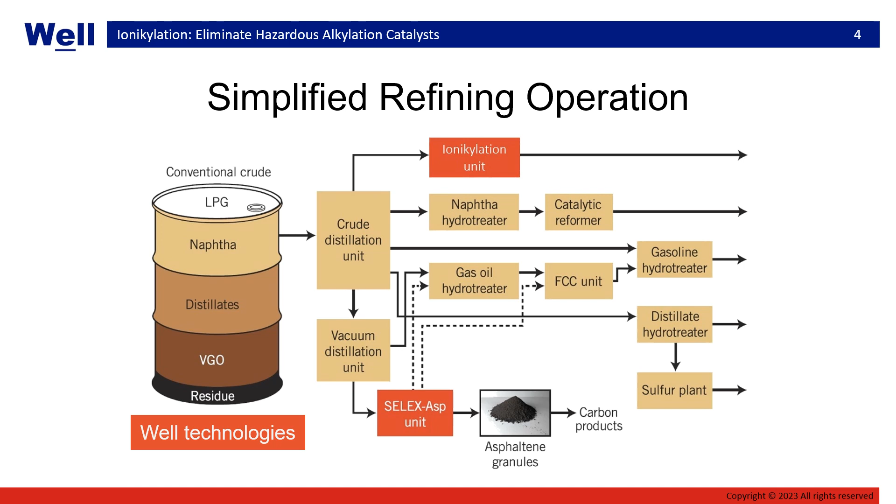Well Resources currently offers two unique and commercially proven technologies to the downstream sector. One of these technologies, shown at the bottom, is the selective extraction of asphaltenes, or SELEX process, and this is a carbon granulation and removal process for upgrading and decarbonizing the bottom of the barrel. The other technology is our safe and sustainable alkylation process called Ionikylation, which makes use of a proprietary composite ionic liquid catalyst, and this technology is the focus of today's discussion.

The objective today is to provide you with an overview of the Ionikylation technology and give you some insight into our numerous commercial successes within the last decade. We're going to start the discussion today with an overview of alkylation, seeking to answer the questions: what is alkylate? How is alkylate produced? And why are traditional alkylation processes inadequate? We'll then go on to describe the Ionikylation process, including what makes it unique, what are the advantages, and what is the commercial status of the technology.

Alkylation overview. The alkylate market is lucrative and has seen good historic growth. It is expected to grow even further over the next decade. In 2021, the global alkylate market was estimated at $1.15 billion, and it is expected to exceed $1.5 billion by 2029. This represents a compound annual growth rate of about 3.8% for that period.

This growth is underpinned by a variety of factors. In the developing world, robust population growth and increasing standards of living are driving gains in overall gasoline consumption, and by extension, alkylate consumption. In developed economies, overall gasoline demand is expected to drop throughout the years of 2025 to 2050. But nonetheless, we see a shift towards higher performance fuels for higher efficiency engines, which supports the alkylate demand.

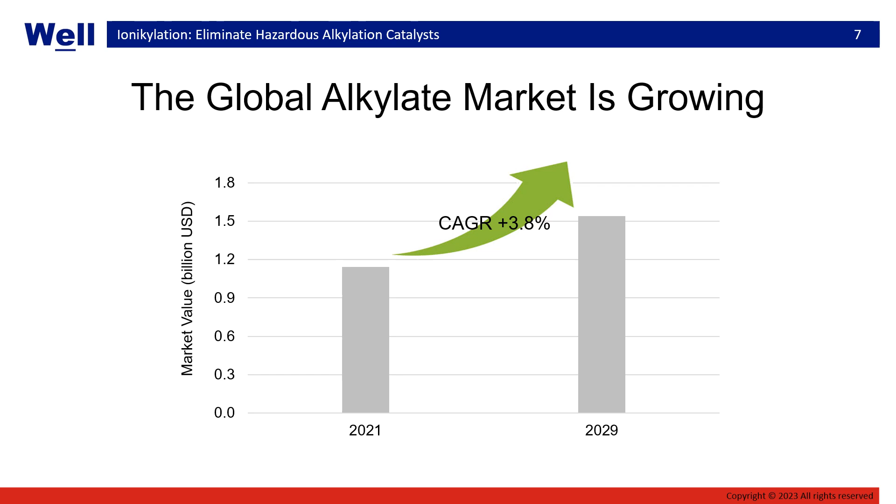From a process chemistry standpoint, alkylation is simply a chemical process where an alkyl group is attached to an organic substrate. But in a refinery setting, alkylation refers to a particular process that reacts light, mixed olefin feedstocks into predominantly C8 compounds for blending into the gasoline pool. Alkylate is known for its inherently high octane number, typically in the range of 92 to 96, and as high as 98 to 100. It increases the knock resistance of a fuel, is clean burning, is free from olefins and aromatics, and has low sulfur content.

When we look at the various alkylation processes on the market, an important question to ask is, how do we get from point A to point B most effectively, contextualized by the technical, economic, and environmental factors? Traditional alkylation processes have been used for roughly 80 years, and they make use of strong acids to break chemical bonds and facilitate that alkylation reaction.

The main catalysts currently in use include hydrogen fluoride or concentrated sulfuric acid. With these catalysts being strong and highly corrosive acids, the physical processing infrastructure is typically constructed using expensive and exotic metallurgy, and operators require the use of robust safety and containment systems. This is especially true for hydrogen fluoride, as it has a propensity to vaporize into a dense toxic cloud that can threaten the livelihoods of plant personnel and the public.

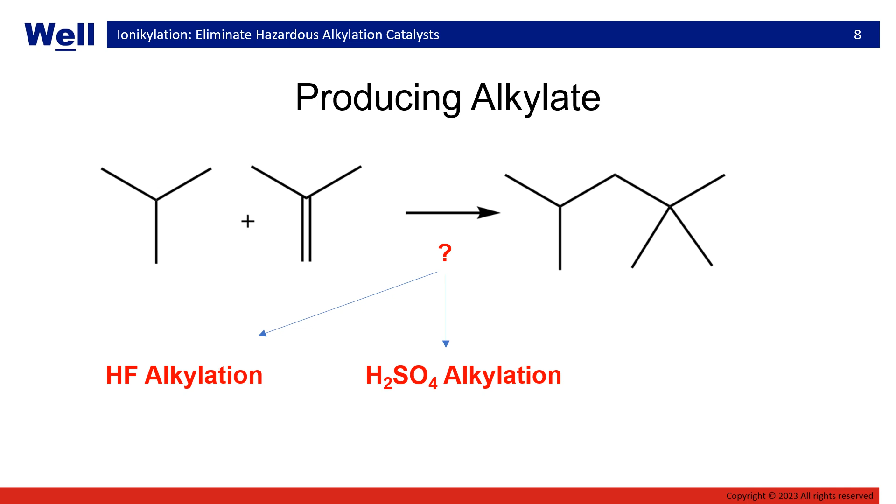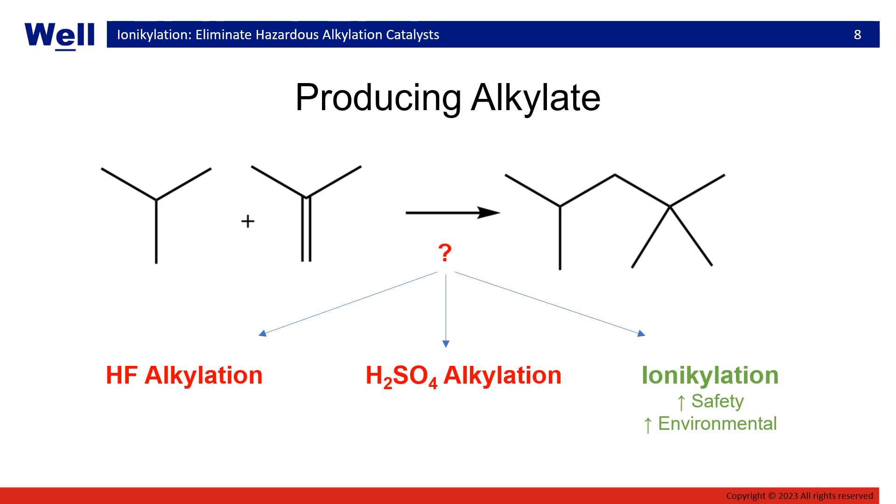With sulfuric acid, large volumes of catalyst are required, and this poses an environmental risk when considering the high emissions intensity associated with its regeneration. WELL's Ionikylation technology leverages new sciences to address both the safety and environmental problems commonly associated with acid-based technologies without sacrificing performance or cost.

And this is important because refinery infrastructure all around the world is aging. In North America, we see a trend of cost cutting through maintenance and capital deferment to get longer run lengths, and a general cautiousness towards newer process investments. And every couple of years, near-miss incidents like these not only threaten the livelihood of businesses, but also the safety of workers and the community at large.

More frequently, old and unreliable refinery processing equipment may not necessarily lead to a near-miss incident, but unplanned shutdowns may lead to market disruptions and other business interruptions. Acid alkylation processes can be especially problematic as corrosion risk combined with aging infrastructure can form a recipe for disaster. On the left is an instance from 2019 where a U.S. refiner's HF alkylation unit suffered a catastrophic disaster, and the operator subsequently filed for bankruptcy protection.

Earlier this year, another explosion in an alkylation unit in South Korea tragically claimed the life of one and injured 9 others. Nobody ever wishes for this to happen. Events like this have become topics of heated debate as to whether the use of toxic and dangerous chemicals in refineries should even be permitted, especially if these operations are close to urban centers.

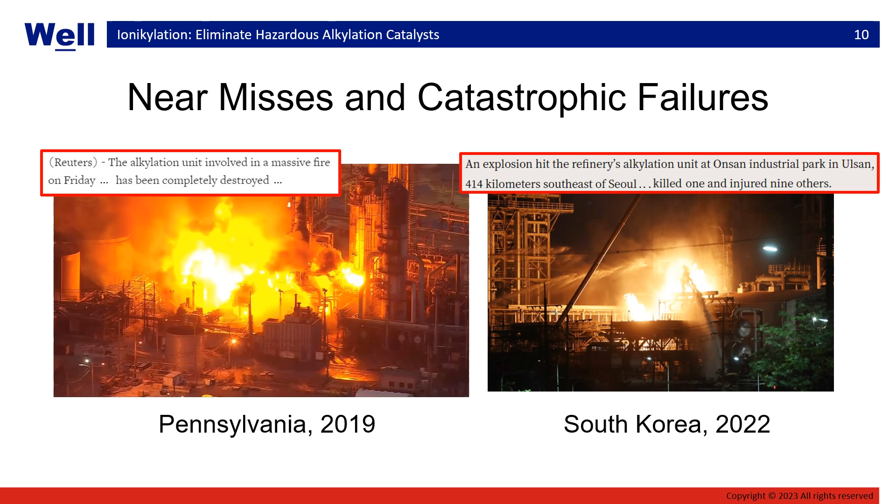Case in point, United States Chemical Safety Board, October 11th, 2022. The Chemical Safety Board published its more than 100-page final report on the 2019 Philadelphia Energy Solutions fire and explosion, where they highlighted the inherently unsafe nature of HF and what went wrong during that operation. As part of its recommendations to the EPA, the Chemical Safety Board said that technologies are being developed that could be safer alternatives to HF alkylation, and refiners should periodically evaluate these available alkylation technologies.

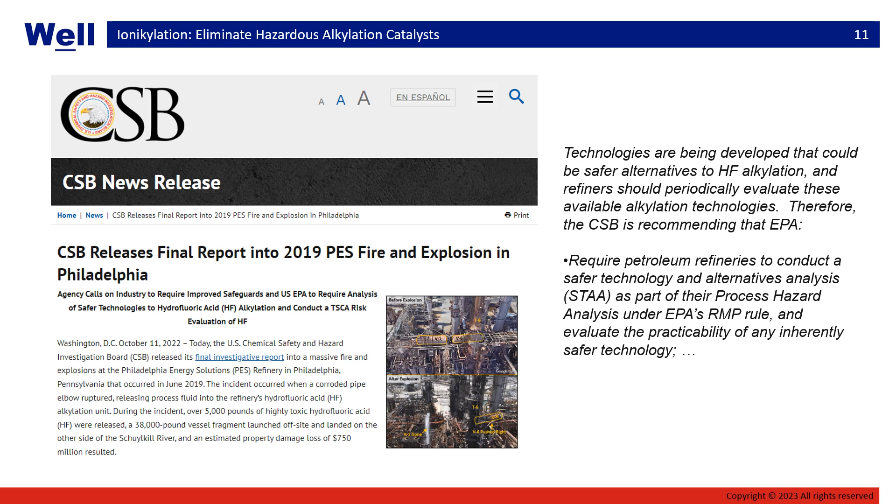The CSB is recommending that EPA require petroleum refineries to conduct a safer technology and alternatives analysis as part of their process hazard analysis under EPA's RMP rule, and evaluate the practicability of any inherently safer technology. To put it this way, in North America, regulatory authorities are stopping just short of a call to action forcing the implementation of safer alkylation alternatives. But as new technologies become more widely adopted, it will be increasingly difficult for refiners to justify continuing the operation of these unsafe acid-based alkylation processes.

In engineering and occupational health and safety, there's this principle called the hierarchy of hazard controls. At the top are the most effective ways to control your hazards, starting with outright elimination. As we move down this inverted pyramid, we observe a decrease in effectiveness while costs are additive with each layer. With traditional alkylation processes, the hazard is the catalyst itself. Being reliant on acid catalysts to run a process, refiners are then left with engineering, administrative, and physical protective controls to mitigate that risk.

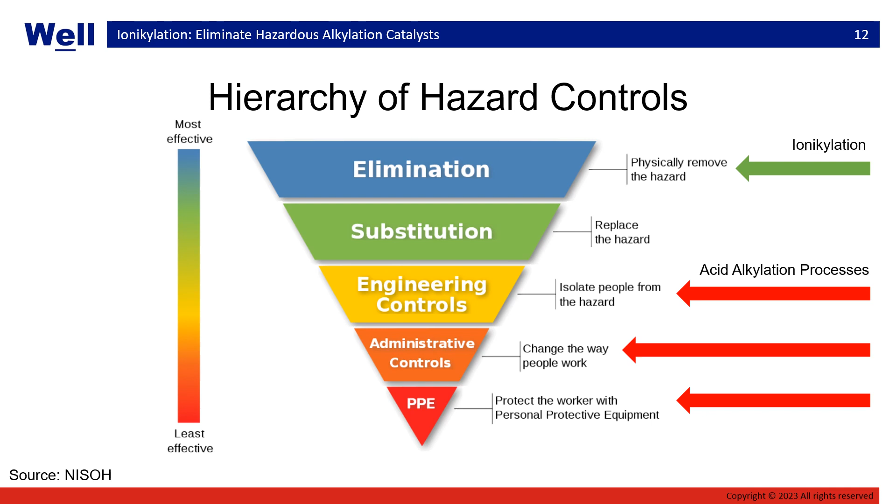For an HF alkylation unit, for example, this will include safety measures such as water cannons, water curtains, secondary containment, advanced air quality monitoring systems, specialized additives, containment suits, and specialized training and evacuation procedures. With our Ionikylation process, the intent is to outright eliminate that hazardous catalyst, enabling a refiner to simplify their operations, lower their costs, reduce the risks, and in some cases, save lives.

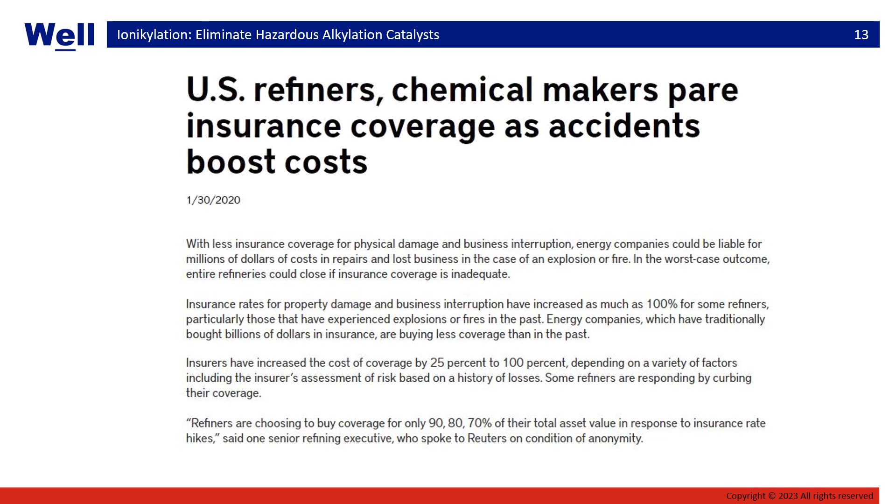We'll now move on to the discussion of the Ionikylation process itself, which derives its name from the composite ionic liquid catalyzed alkylation. Ionikylation is a commercially proven process backed by over 20 years of research and development in the ionic liquid space. The process is characterized by 5 sub-processes: feed pretreatment, reaction, product separation, product treatment, and catalyst regeneration.

The first step in any alkylation process is to pre-treat the feed so that it becomes compatible with the reaction system. Here we will be looking to remove key contaminants such as sulfur, water, and oxygenates. Once treated, the feed is sent to the reactor, where it makes contact with a dense circulating catalyst that facilitates the alkylation reaction. Afterwards, a series of settlers and separators are used to differentiate the reaction products, unconverted reagents, and catalyst, recycling as needed. The alkylate product may be further subjected to a product treatment method depending on the end user's requirements.

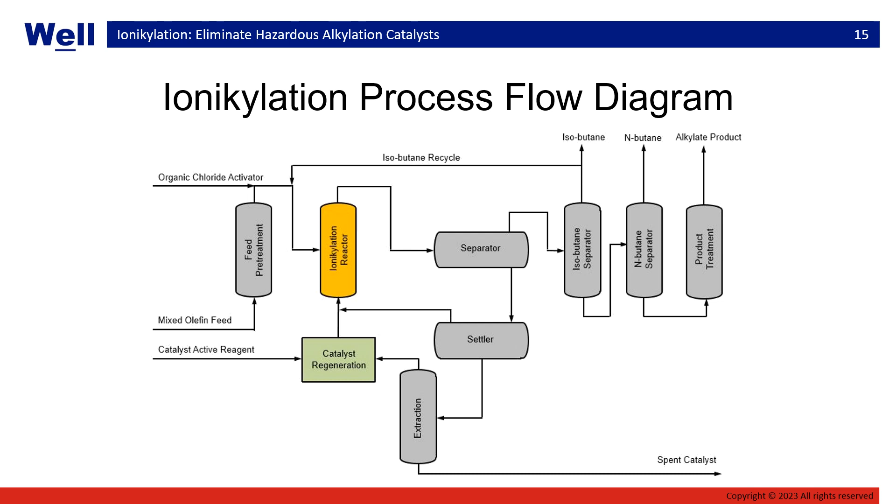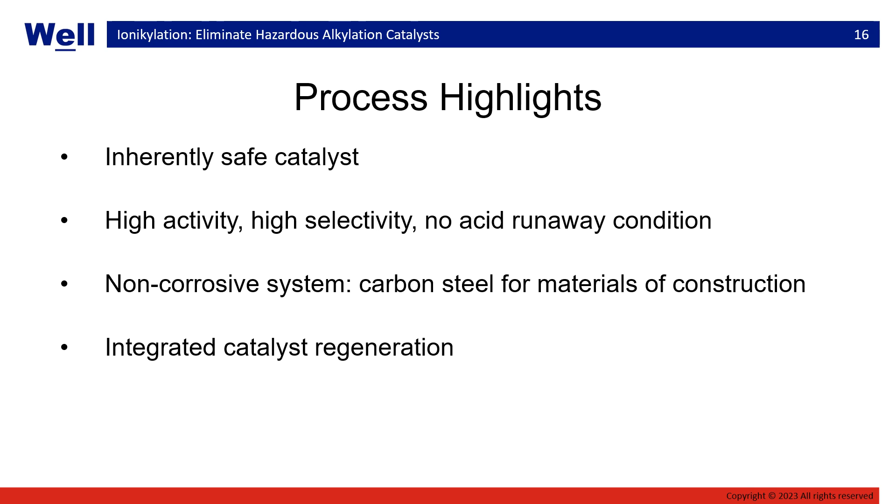Here, the key process highlights for Ionikylation are summarized, which we will cover in more detail. They include the inherently safe catalyst, enhanced performance measures, a non-corrosive system, and the integrated catalyst regeneration. The key to the Ionikylation process is our proprietary composite ionic liquid, or CIL catalyst, which is a specially formulated, non-volatile liquid salt material. This replaces traditional acid catalysts, increasing the safety for refinery personnel and the public.

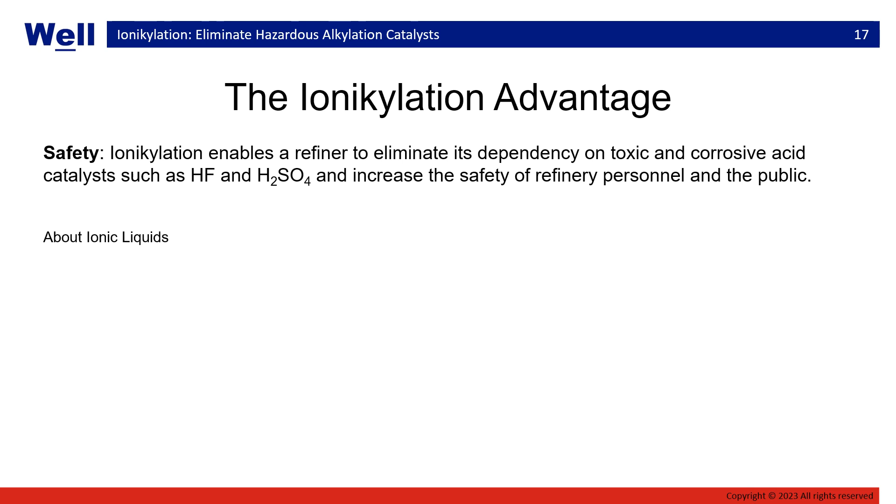Broadly speaking, the use of ionic liquids are based on relatively newer material sciences and innovations. Ionic liquids tend to have melting points below 100 degrees Celsius, and many parameters are available for fine-tuning their characteristics and applications. The chemical composition will affect key properties such as melting point, viscosity, density, solubility, and reactivity. And while acidity of ionic liquids can also be manipulated simply by controlling the concentration of certain species, many still tend to be corrosive. If you now move to the next layer of complexity in ionic liquids material sciences and introduce additional metallic species in the formulation, you get what is known as a composite ionic liquid, where the chemical, physical, and reactive properties can be manipulated even further.

Some notable characteristics about the Ionikylation catalyst is that it is both non-corrosive and exhibits zero or near zero vapor pressure. This means that in a spill scenario, the catalyst remains as a liquid, which enables safe and easy containment. Plant operators working in the vicinity of an Ionikylation unit do not require any special PPE beyond what is customarily deployed in refining operations where personnel may be exposed to light hydrocarbons.

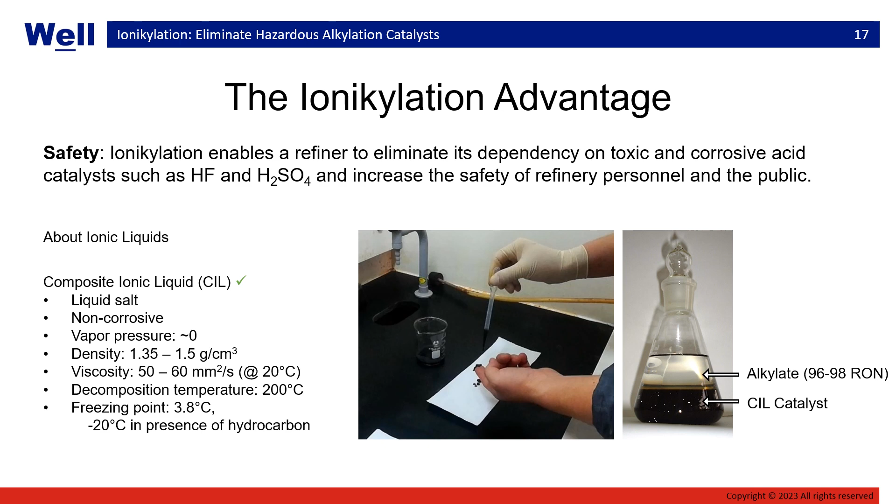Our proprietary catalyst uses a conventional chloroaluminate ionic liquid platform, modified with a transition metal to enhance the reaction mechanics. This enables the catalyst to overcome poor product selectivity issues that are commonly associated with simple ionic liquids, without the need for acidic additives such as hydrochloric acid. Here, it should be noted that when we refer to the term chloroaluminate ionic liquid, this means any ionic liquid that contains the tetrachloroaluminate anion.

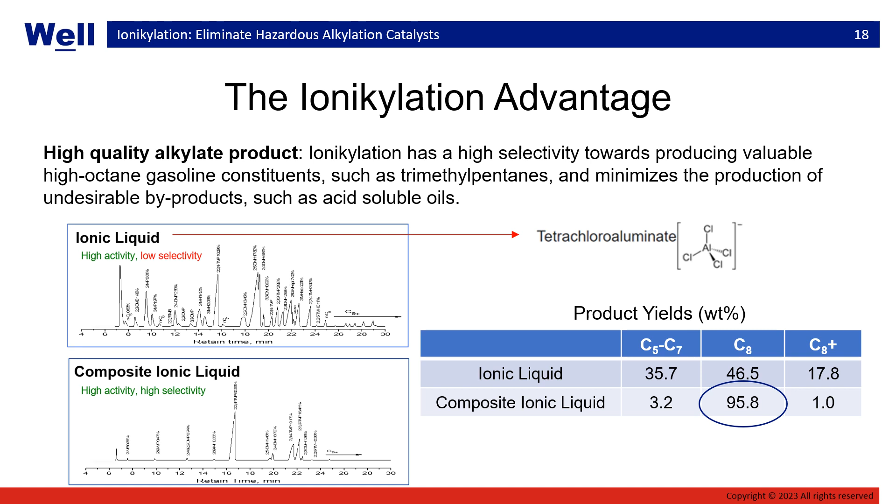N-paraffins are non-reactive in our process, and we recommend excess isobutane in the feed to ensure complete conversion of the olefins. C4 olefins will be alkylated with isobutane up to C8. C5 olefins will be alkylated up to C9, and so on.

Lastly, with a little bit of luck, the research team was able to finally develop an optimal CIL catalyst that could overcome all of the issues mentioned previously, in that it produced the desired alkylate, was non-corrosive, and could be easily separated from alkylate product.

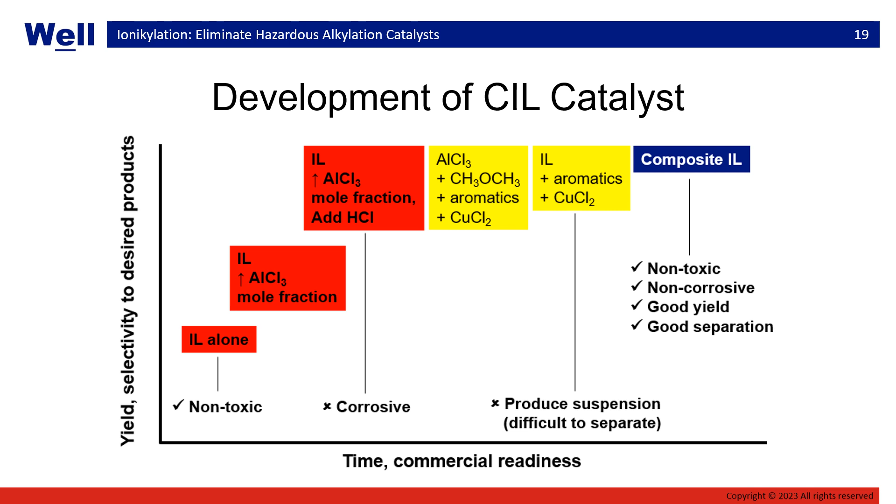Due to the non-corrosive nature of the catalyst, all of the Ionikylation process equipment is manufactured with low-cost carbon steel. The process is also run under mild operating conditions, which lower both the capital and operating costs in relation to the reference technologies. The materials of construction will undoubtedly have a significant impact on project budgeting. But beyond that, in today's day and age where supply chains are in disarray, the sourcing of readily available carbon steel equipment as opposed to specialty equipment can also benefit the project execution timeline.

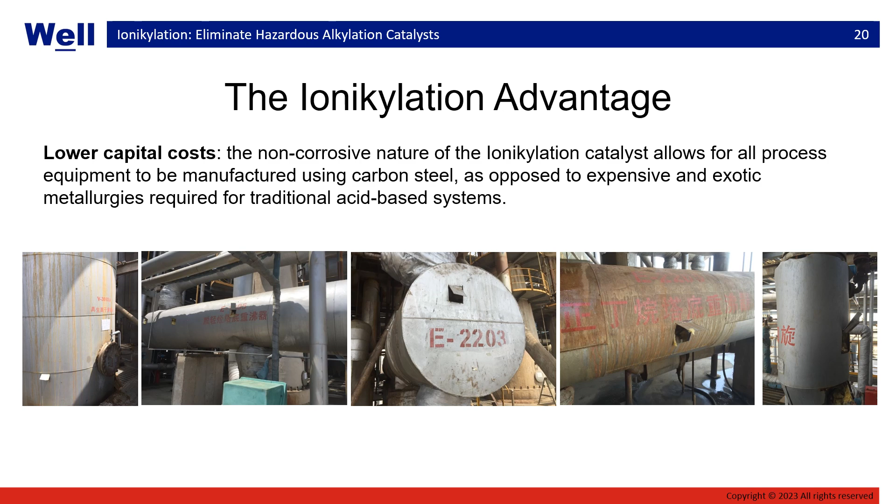Ionikylation includes a mild on-site catalyst regeneration unit, which significantly reduces emissions as compared to energy-intensive acid treatment processes. When using sulfuric acid, for example, the regeneration process entails a thermal decomposition near 1,000 degrees Celsius into gaseous sulfur dioxide, water, and oxygen. This gas mixture is then scrubbed clean, cooled, condensed, and reformed into acid.

The spent catalyst removals are offset with what we call catalyst active reagents, which are lower cost raw materials that reconstitute into CIL catalyst at the regeneration unit. From our experience, our clients' decisions to opt for a self-cleaning process with a nominal makeup requirement versus an option to completely regenerate catalyst all comes down to a matter of cost and emissions.

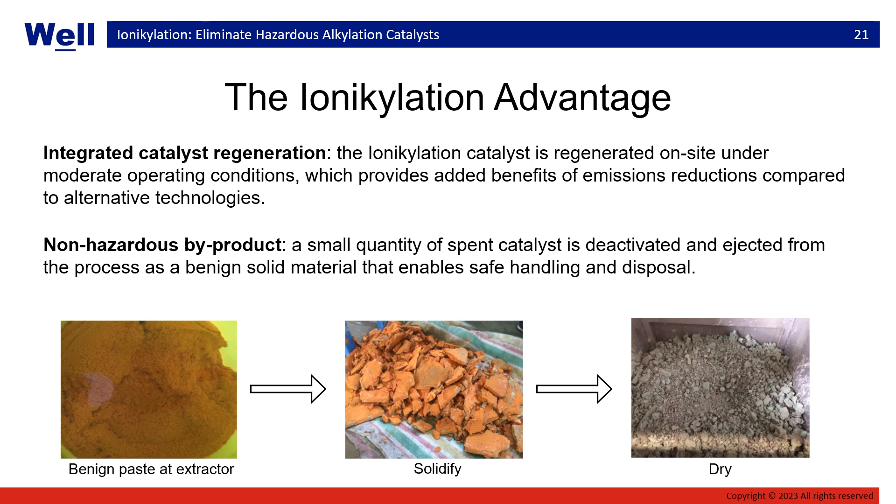As mentioned earlier, Ionikylation is technology that has been decades in the making. Catalyst and early process development commenced in 1998, and the first lab-scale pilot was developed in 2003, capable of processing 20 metric tons per year. In 2005, our research group was invited to conduct a commercial catalyst retrofit test for a 65,000 tons per year sulfuric acid alkylation unit at a PetroChina refinery.

This test yielded some promising results, and it also allowed the team to gather important information to improve the design for future iterations. Notably, the retrofit increased the process unit's capacity by 40%, while increasing the light alkylate yield by 5%, and the overall alkylate yield by 2.3%. The alkylate research octane number was also increased by 3.8 points to 98.8.

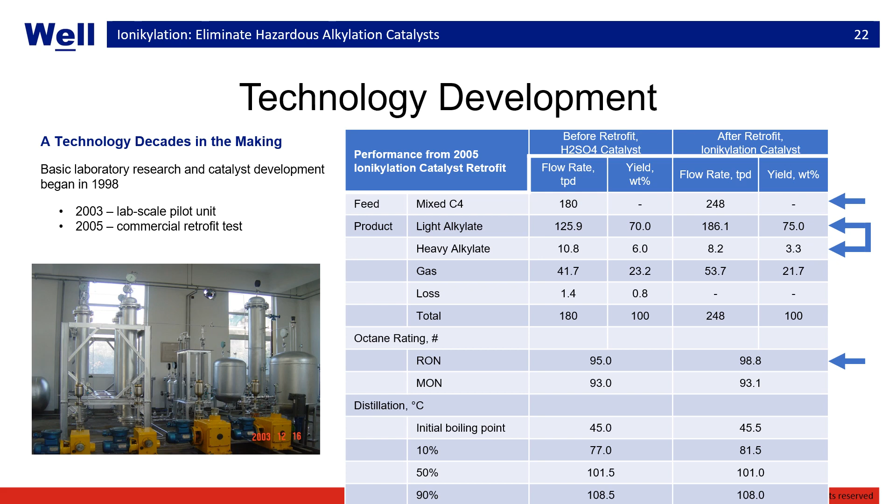Over the last 5 years, Ionikylation has become the alkylation technology of choice amongst refiners looking to modernize their operations and improve their safety profile. The first commercial unit was commissioned in 2013 by the Chinese independent operator, Dayan Chemical Company. This was a 100,000 tons per year greenfield and standalone alkylation operation that purchased feedstocks from the local market and sold the alkylate back into that market as a value-added product.

In 2018, PetroChina commissioned its first Ionikylation unit at its Harbin refinery with a processing capacity of 150,000 tons per year. The operator has disclosed that the total turnkey capital cost for the project was a mere $46 million. The next year, PetroChina followed up this unit with another one sized 50,000 tons per year at its Golmud refinery.

The second Sinopec unit was at its Wuhan refinery in 2020. This unit set a milestone as the world's first commercial revamp from an existing HF alkylation unit using ionic liquids. This revamped unit was one of 2 remaining HF alkylation processes in operation in China. The Sinopec Anqing unit's construction was completed in 2020, but due to the coronavirus pandemic, the commissioning was put on hold until Q1 earlier this year.

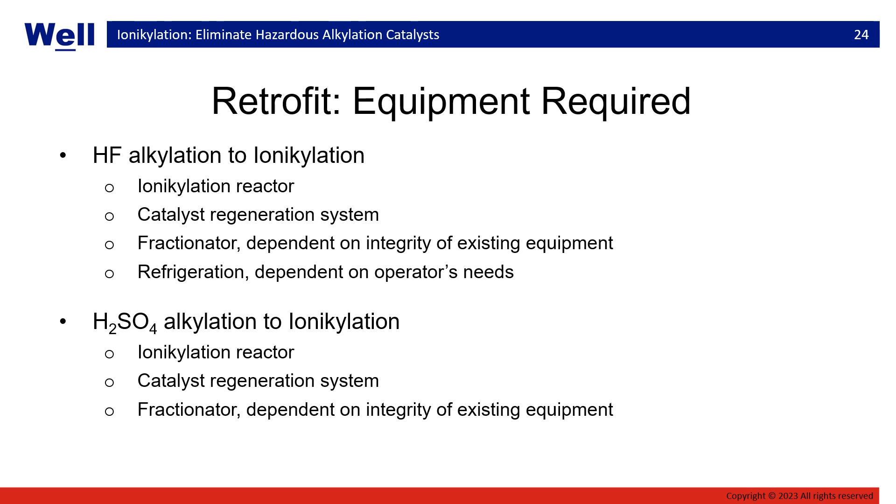But for revamping an HF alkylation system, which typically doesn't have additional cooling, refrigeration might only be a consideration if an end user intends to produce even higher quality alkylate. But by all means, the inclusion of a dedicated cooling system is not required. In any case, each conversion scenario is considered on a case-by-case basis, and the goal is to reuse as much of the existing infrastructure as possible, having minimal impact on operations while occupying the least amount of space.

To summarize, Ionikylation is a safe, sustainable, and viable alkylation technology that provides an alternative to the traditional acid-based processes. We make use of a non-corrosive composite ionic liquid catalyst that facilitates the production of high-quality products, and all of the process equipment is manufactured using low-cost materials. This is also a commercially proven process where the scale-up considerations have been de-risked. In total, 7 units have been commissioned, including 1 for the elimination of HF, and nearly 1 decade of operational demonstration has been generated. I'll now turn things back over to Beverly for some final remarks.

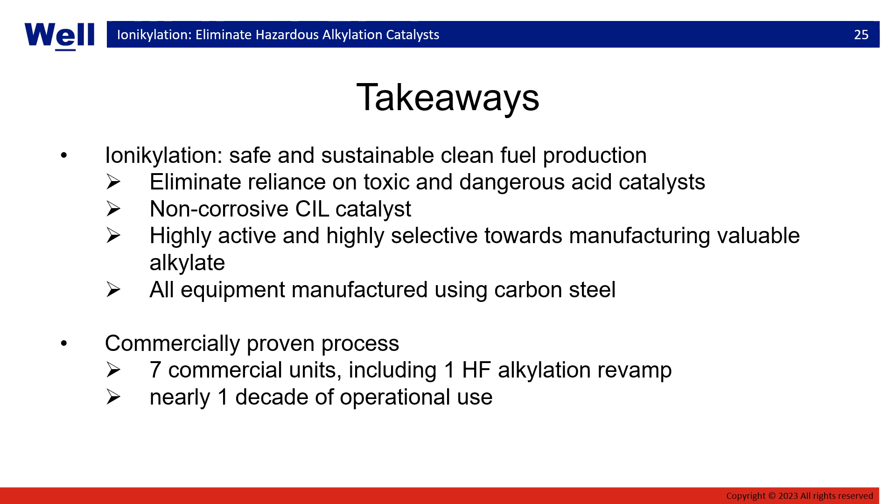Thank you, Belle, for that insightful presentation. Well Resources strongly believes that there will be a place for safe and sustainable clean fuel production in the energy mix of the future. However, in light of recent incidents that have highlighted the inherent dangers of acid-based alkylation processes, the refining industry is now facing increased pressure to look for safer alternatives. Ionikylation has the potential to transform the landscape by providing refiners with a commercially proven alternative that doesn't have to break the bank. Our company remains committed to providing the industry with leading-edge and common-sense solutions to build a sustainable future.